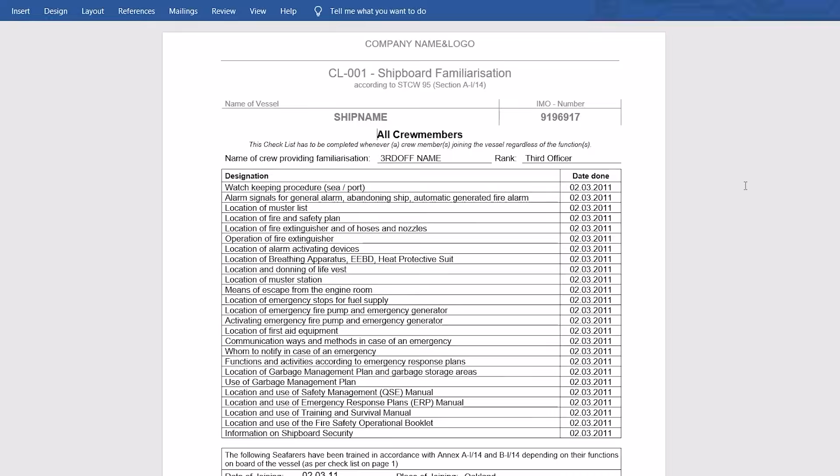In this first part of the advanced guide, let's look at the Shipboard Familiarization Checklist, the document that is one of the first you will have to deal with when joining the ship.

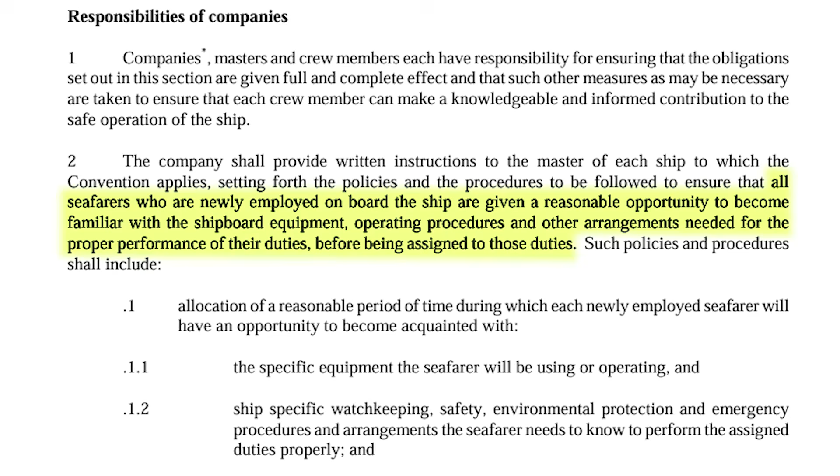In accordance with the STCW convention, all seafarers who are newly employed on board the ship should be given a reasonable opportunity to become familiar with the shipboard equipment, operating procedures, and other arrangements needed for the proper performance of their duties before being assigned to those duties.

When you come on board, you'll be familiarized with the ship by the third officer that you are going to relieve. Then, using this checklist, you'll show the ship to other newcomers and explain everything in detail. From company to company, these checklists vary, but in common they contain the same information.

So let's go through one of these shipboard checklists, as well as go through the ship with it. Usually, the Shipboard Familiarization Checklist consists of several parts, such as familiarization of all crew members regardless of functions, familiarization of deck officers, familiarization of engineers, and familiarization of passengers.

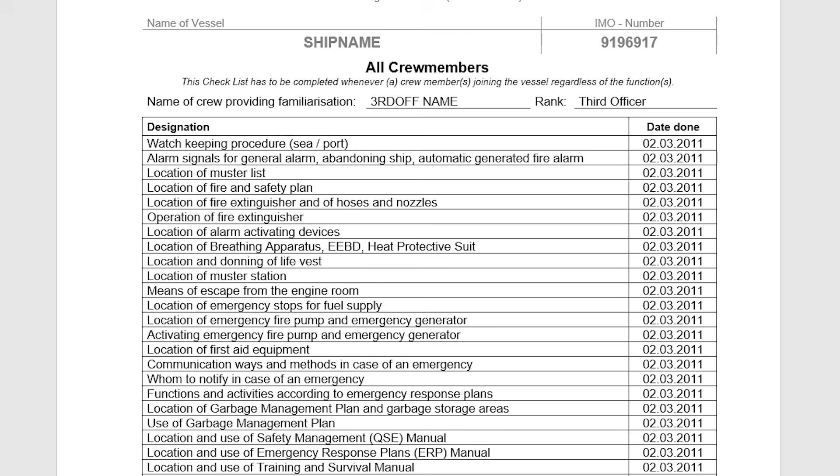Some checklists also are divided into parts based on when familiarization must be completed, like on the day of joining the ship, within 48 hours, etc. Necessary safety-related items have to be covered before sailing or within 1 day respectively. The other items shall be covered within 1 week.

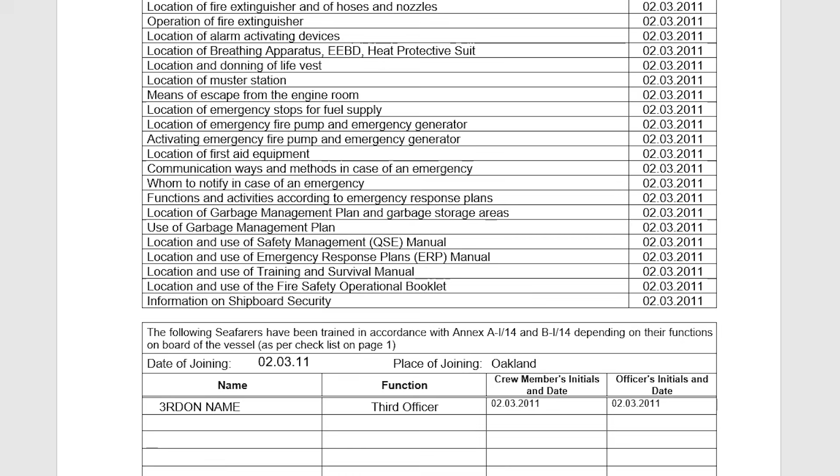After completion, the checklist will be signed by the respective crew members and countersigned by the master. The signed checklist remains in the shipboard file.

So first, let's see what all crew members must be familiarized with: watchkeeping procedure, at sea and in port.

At sea, the third officer usually keeps navigation watches 4 hours on and 8 hours off, from 0800 to 1200 and from 2000 to 2400, taking over the watch from the chief officer and handing over the watch to the second officer. In port, he keeps cargo watches 6 hours on and 6 hours off, from 0600 to 1200 and from 1800 to 2400, sharing the day with the second officer.

If there's a junior officer on board, the cargo watch may be the same as the navigation watch, 4 hours on and 8 hours off.

Usually also the third officer has 2 hours of overtime work when he's busy with maintenance of safety equipment. Exact duties usually are described in company SMS and handover notes that the leaving third officer will give you.

Alarm signals for general alarm, abandoning ship, automatic generated fire alarm. Which alarm signals are used on board you can find in the muster list and your cabin card. Usually they are as follows: general emergency alarm.

7 or more short blasts followed by 1 prolonged blast on the ship's whistle and internal bells, used for fire, collision, or immediate danger, requiring all crew to go to muster stations.

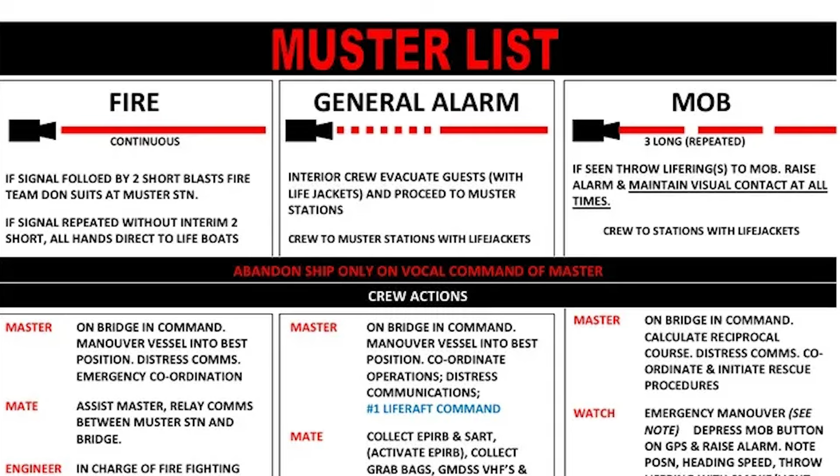Usually 3 long blasts, indicating someone has fallen overboard.

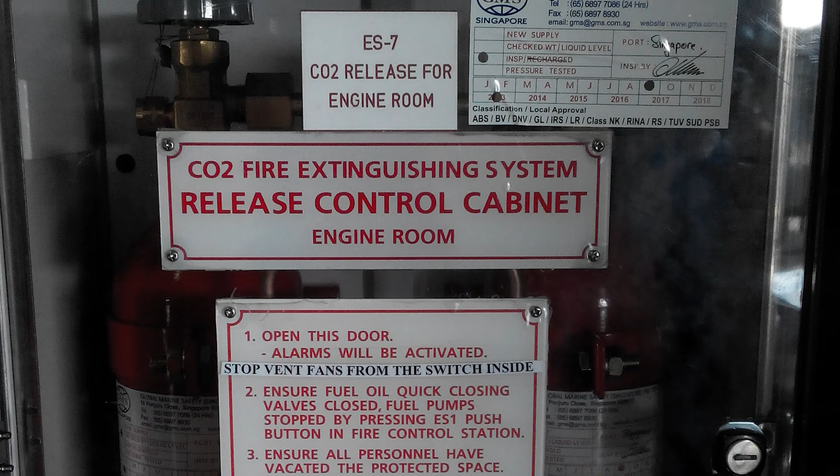Fixed fire extinguishing system alarm, CO2, automatically generated: a distinct, very loud audio-visual alarm that sounds before discharging CO2 or foam into cargo or machinery spaces. But usually, except automatic generated fire alarms, only the general alarm is used with further announcement of the reason.

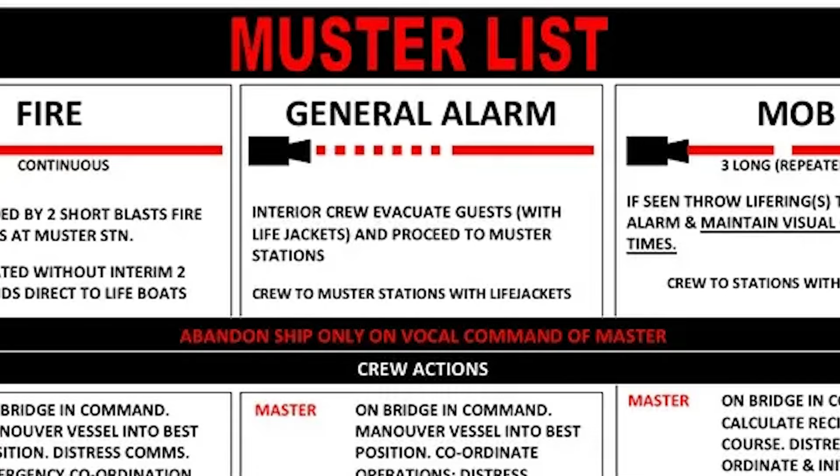General alarm push buttons are usually located on the navigation bridge and emergency headquarters. Additional manual call points, red boxes, are strategically installed throughout the vessel, particularly near exits, stairway landings, and corridors, ensuring accessibility to all crew members.

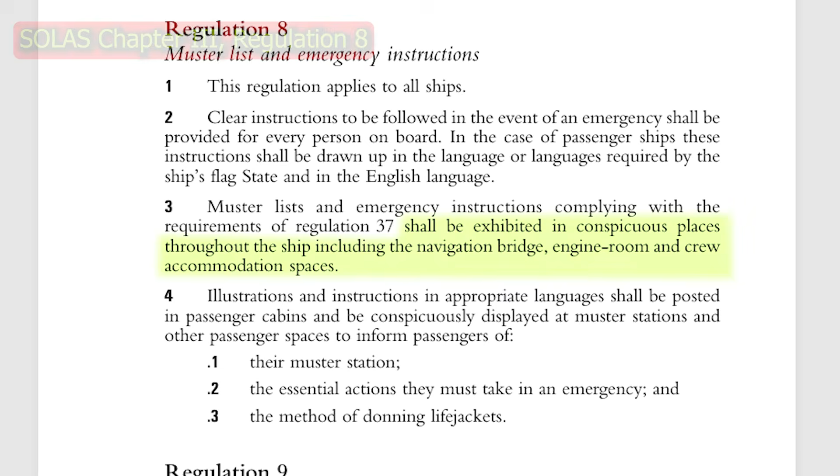Location of muster list. According to SOLAS, muster lists must be posted in conspicuous, highly visible locations throughout the ship, particularly where they can be easily referenced by crew.

Usually those locations are the navigation bridge, engine control room, and all crew accommodation decks. Don't forget also that the muster list with names of newcomers shall be prepared before the ship proceeds to sea.

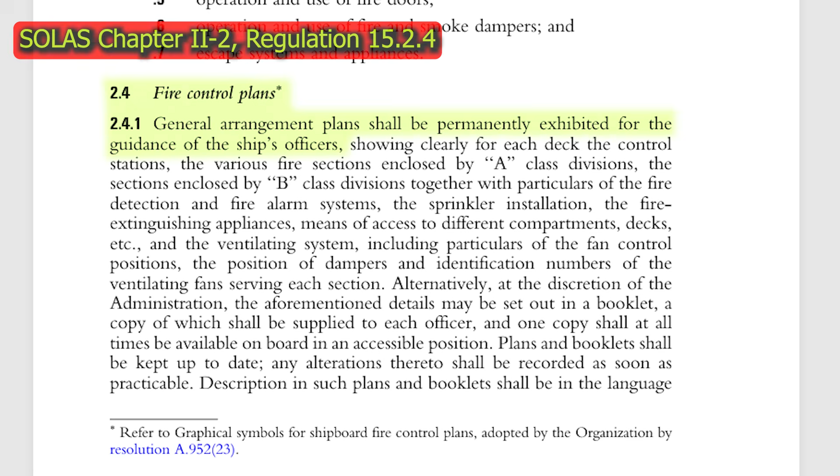Location of fire and safety plan. The fire control plan must be permanently exhibited in conspicuous, highly visible locations for the guidance of the ship's officers. These typically include the navigation bridge, engine control room, and accommodation areas.

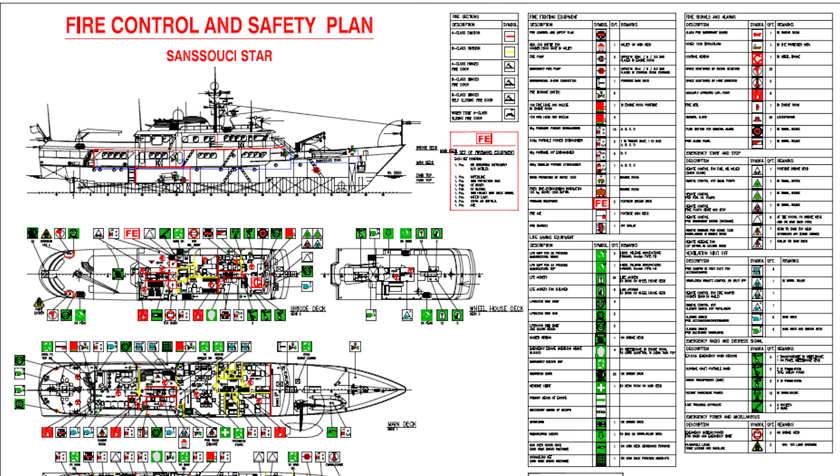A duplicate set of fire control plans or a booklet containing the plans must be stored in a prominently marked, weather-tight enclosure located outside the deckhouse for the assistance of shoreside firefighting personnel.

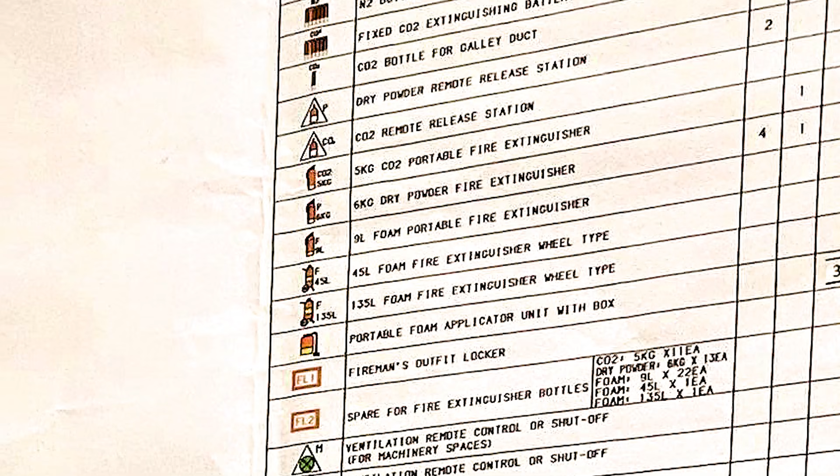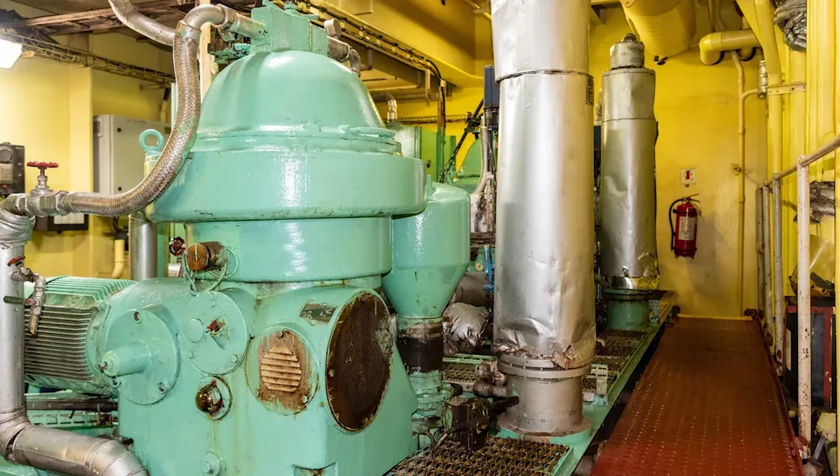Location of fire extinguisher and of hoses and nozzles. Location, number, and kinds of fire extinguishers can be found on the Fire Control and Safety Plan. Fire extinguishers are placed according to the likely fire source: CO2 near electronics, navigation bridge and control rooms; foam near oil; engine room dry powder; accommodation areas wet chemical; the galley, with at least one extinguisher located near the entrance of any major space.

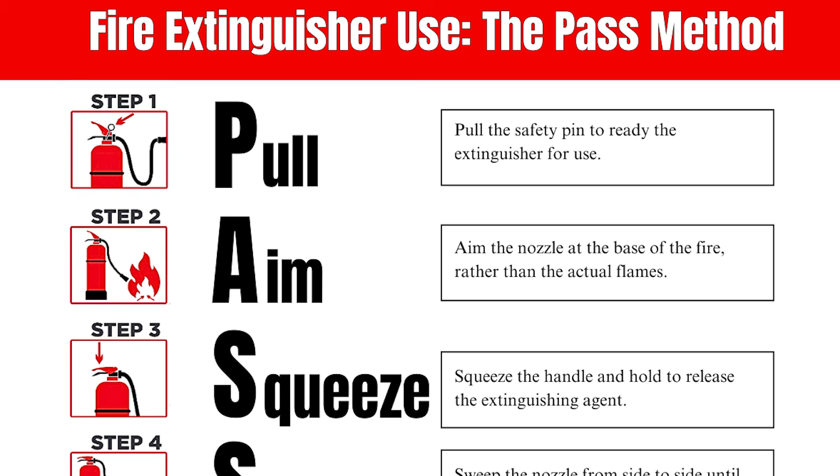Operation of fire extinguisher. The steps on how to operate a fire extinguisher can be found printed on it or in the fire training manual. Most portable fire extinguishers on board ships—powder, water, foam, and carbon dioxide—are operated using the Universal PASS algorithm. This is an international standard that is easy to remember: Pull the pin, Aim the nozzle, Squeeze the lever, Sweep—move the hose from side to side.

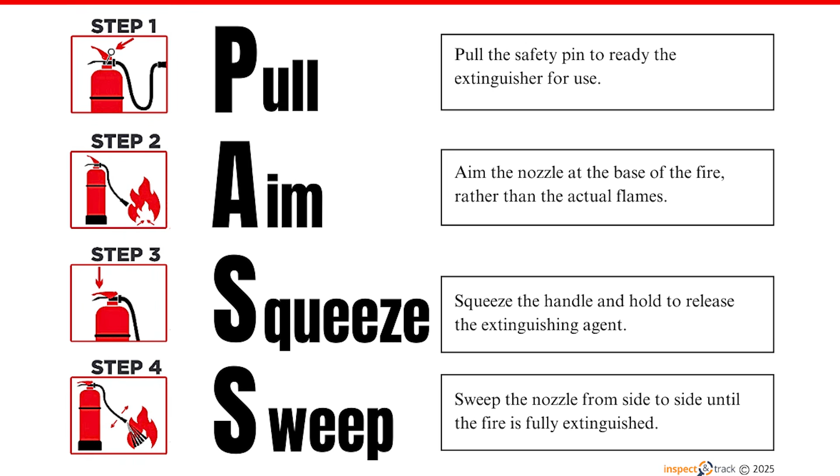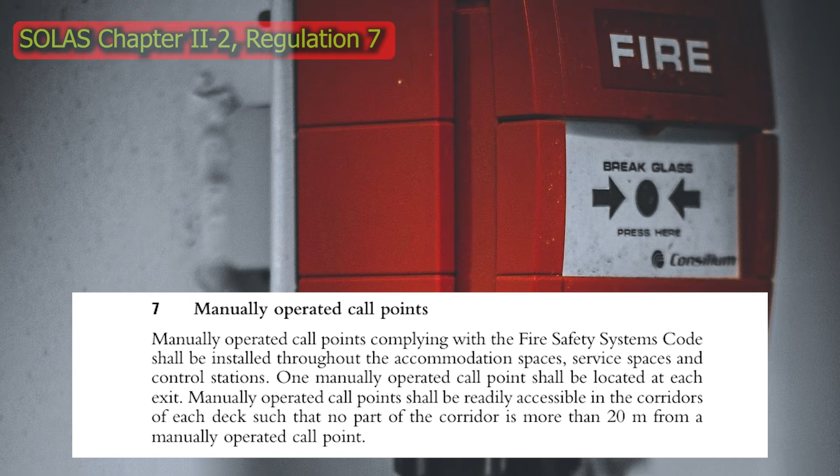Location of alarm activating devices can be found on the Fire Control and Safety Plan. These are the general emergency alarm. The main activation device, the contact maker, must be located on the navigation bridge. Manual call points, the red break-glass buttons that allow the crew to raise the alarm manually, are installed at each exit to the open deck, near stairwells, and in corridors.

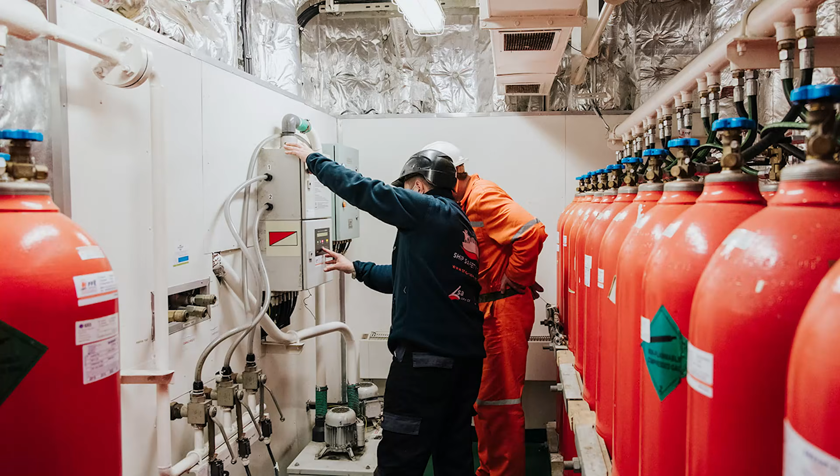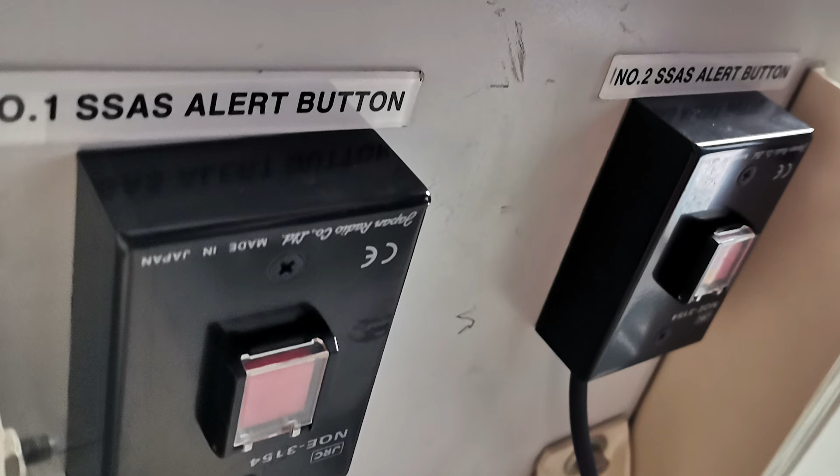Smoke detectors are located in cabins, corridors, stairways, and public areas. The CO2 start alarm is activated automatically when the door of the control cabinet for starting the volumetric fire extinguishing system is opened. The Ship Security Alert System is a silent alarm system to protect ships from piracy and terrorism.

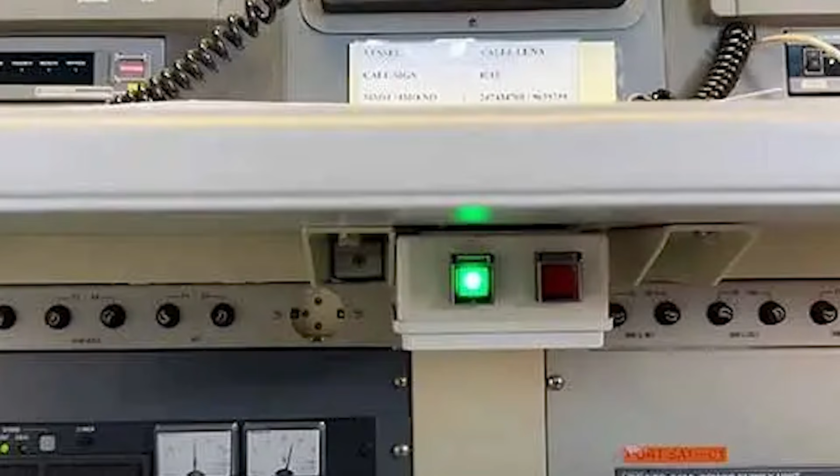SOLAS requires at least two hidden alarm activation push buttons. One should be on the navigation bridge, and the other should be in another location accessible to the crew but hidden from view, for example in the captain's cabin or control room.

Location of breathing apparatus, EEBD, and heat protective suit. These can be found on the Fire Control and Safety Plan. Breathing apparatus and heat protective suit are part of the fireman's outfit that you can usually find in special fire cabinets or at fire stations, typically located in the superstructure, emergency headquarters, and forward in the bosun store or engine room.

Emergency escape breathing devices, EEBD, are intended only for exiting smoke-filled rooms. They are located in corridors along escape routes, in the engine control room, in the workshop, and near the evacuation ladders on each deck of the engine room. Spares are usually stored on the bridge or in the control room.

Location and donning of life vest. Location of life vest, life jacket, can be found on the Fire Control and Safety Plan. In your cabin you should have your personal life jacket and immersion suit. The donning instruction is usually printed on it. You can also find all instructions in the SOLAS training manual that is kept on board the ship.

To don a SOLAS certified life jacket, follow these basic steps: place the vest in front of you, put it on over your head, fasten the waist belt, connect the buckles at the waist, and tighten them as tightly as possible. Secure the neck and chest straps.

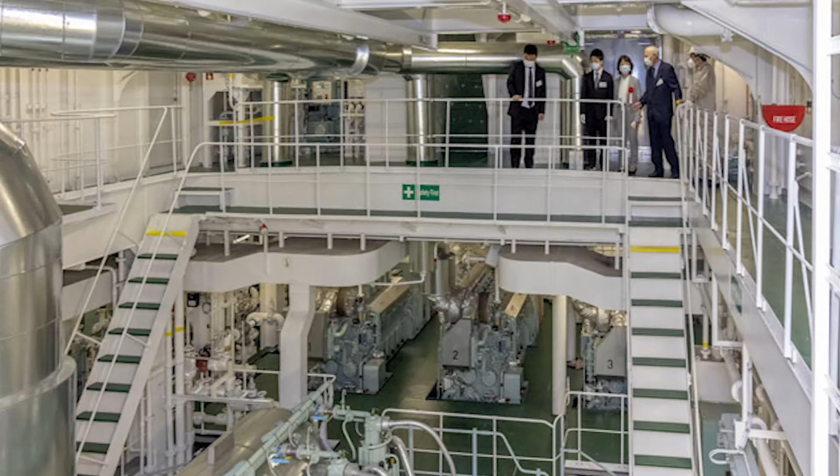Means of escape from the engine room. According to SOLAS, at least two widely separated independent means of escape must be provided from every engine room and machinery space. These typically include vertical steel trunks, ladders, and stairways leading to the open deck, designed to prevent heat and smoke inhalation. Vertical escape trunks are frequently used for quick exit, often leading from the lower platform of the engine room to the top deck or aft toward the steering gear compartment.

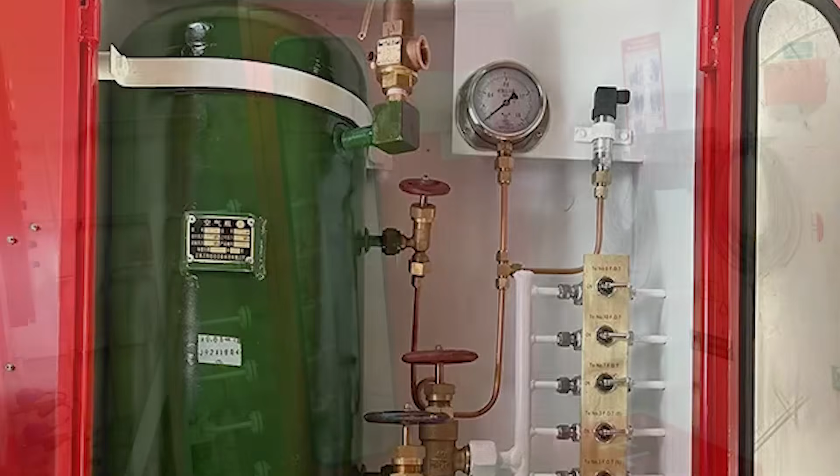Location of emergency stops for fuel supply. Emergency stops, quick-closing valves for ship fuel supply, are commonly located in the engine control room, navigation bridge, and outside the engine room entrance at designated fire control stations. These remote-operated stops allow for rapid fuel cutoff in emergencies, with actuators typically situated in accessible, safe areas away from potential fire risks.

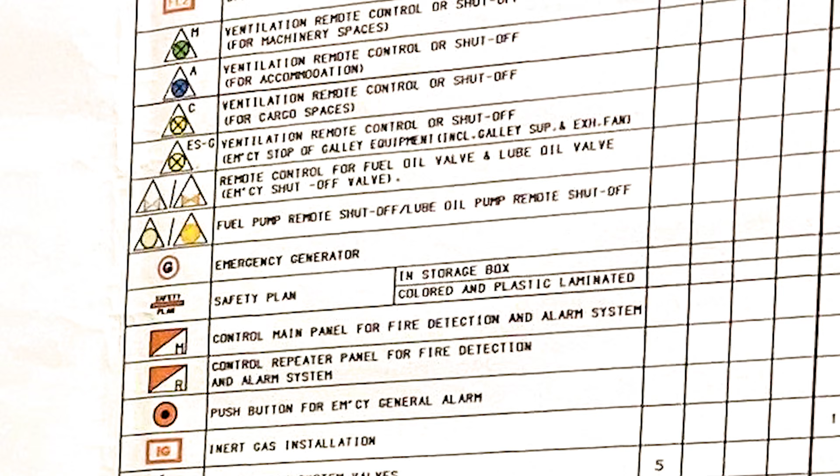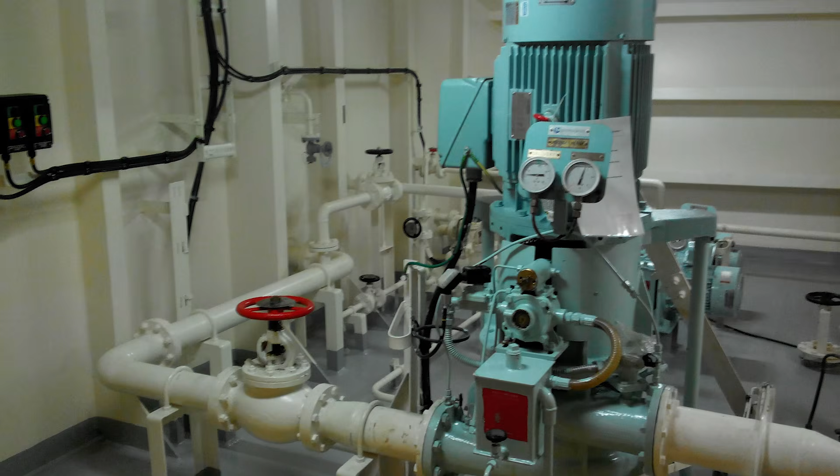Location of emergency fire pump and emergency generator, and activating them. Their location you can also find on the Fire Control and Safety Plan. The emergency fire pump is usually located in a dedicated compartment outside the engine room or forward in the bow thruster room. Usually you can start it from the navigation bridge, engine control room, or its dedicated compartment. The emergency generator is usually located far from the main engine room, often in the superstructure, to prevent a single fire from disabling both main and emergency power.

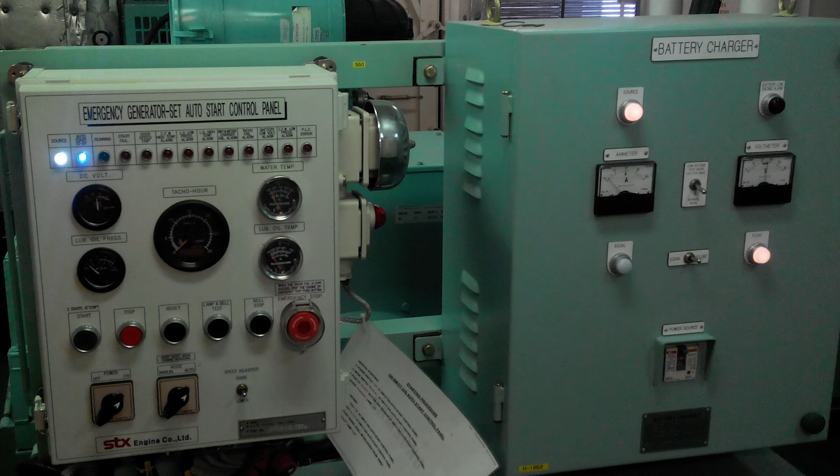The generator starts automatically when a blackout is sensed. An emergency generator on a ship can be started from the emergency generator room, or remotely from the engine control room and bridge.

Location of first aid equipment. In addition to the main ship's medical chest and lifeboat and life raft first aid kits, usually there are a couple more places with first aid kits, like the bridge, engine room, and galley.

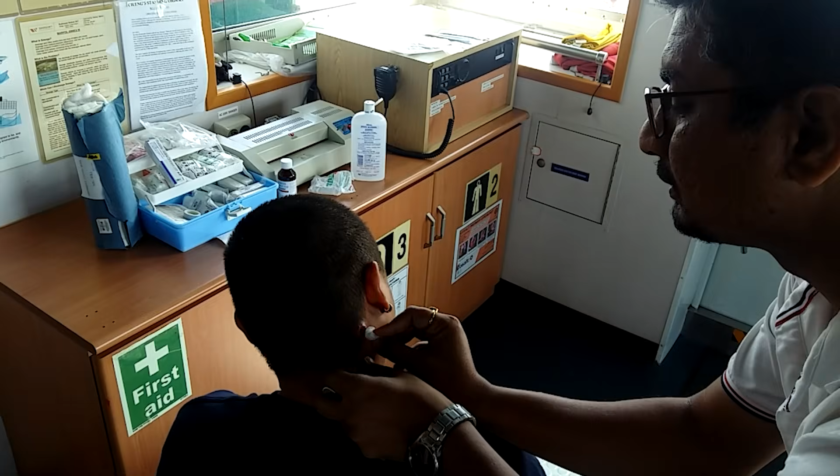Communication ways and methods in case of an emergency. Internal, onboard emergency communications include the general emergency alarm, a signal of 7 short blasts followed by 1 long blast on the ship's whistle and internal alarm system, repeated at least 3 times.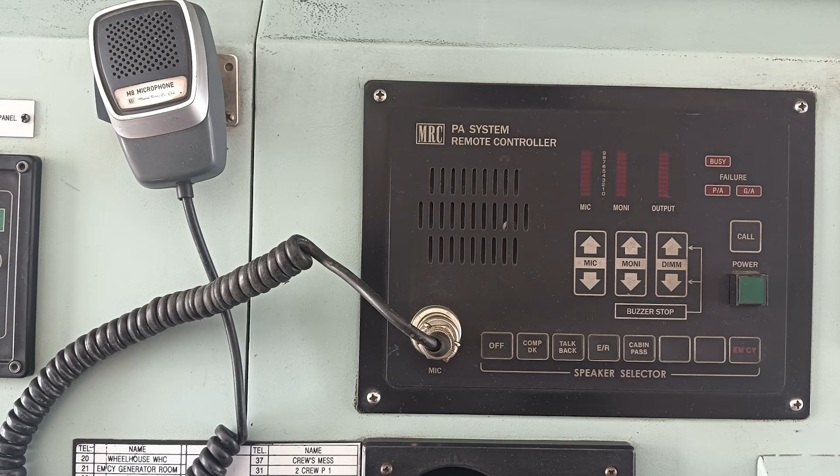Public address, PA system, used for clear voice instructions from the bridge, often superior to alarms in high-noise areas. Sound-powered telephones operate without electricity, allowing communication between key stations - bridge, engine room, steering gear - even during a total power failure. Portable UHF walkie-talkies are used by fire teams or deck crews, often intrinsically safe and explosion-proof.

Whom to notify in case of an emergency. On board, you should inform the bridge and notify the master if something happens.

Use VHF Channel 16 or DSC, Digital Selective Calling button, for a Mayday call to the nearest Coast Guard or Maritime Rescue Coordination Center. Use of GMDSS equipment is usually a separate topic for nautical officers and is not part of familiarization for all crew members. Usually it is company policy that only a certified officer must have access to GMDSS equipment.

Functions and activities according to emergency response plans. Emergency response plans on ships are structured procedures designed to ensure rapid, coordinated action to protect lives, the environment, and the vessel. These plans, often integrated into the Safety Management System, SMS, under ISM code requirements, define specific roles, assembly points, and actions for various scenarios.

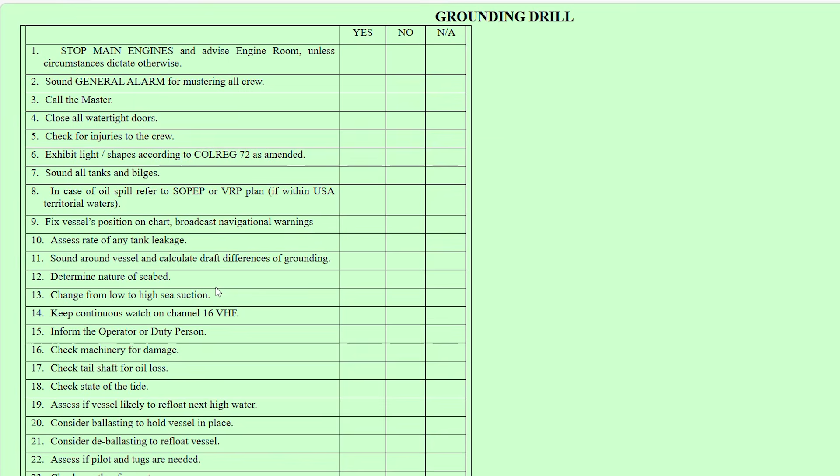In short, this is a document which describes what to do during fire, abandon ship, man overboard, oil spill, flooding, etc. Your personal duties you can find in the muster list. Hard copies of this document are usually located in designated places, like the ship's office and the bridge. Soft copy is located in the ship's computer, usually as part of the company SMS.

Location of garbage management plan and garbage storage areas, and use of garbage management plan. A garbage management plan outlines written procedures for collecting, storing, processing, and disposing of waste, with designated storage areas, often near machinery spaces or away from accommodation, that allow for sorting, compaction, and secure storage.

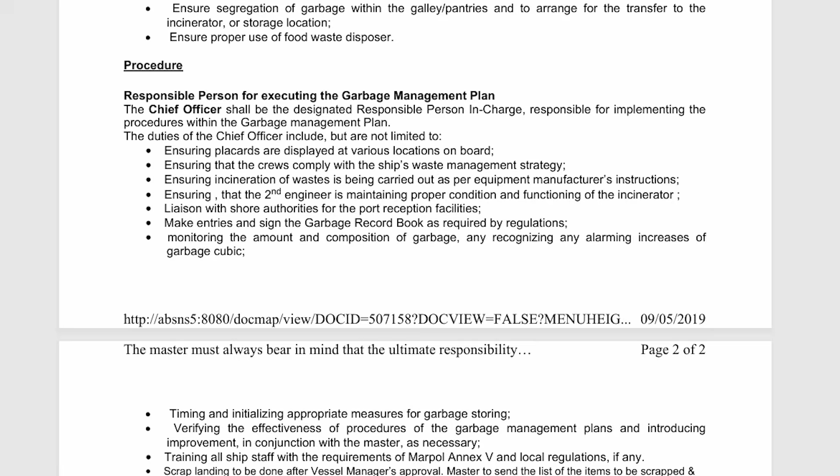Hard copies of this document are usually located in designated places, like the ship's office and the bridge. Soft copy is located in the ship's computer, usually as part of the company SMS. The crew is also usually familiarized with garbage bin colors on board and in cabins, and what kind of garbage each bin is used for.

Location and use of manuals. The location of other manuals and booklets mentioned further in this checklist is the same as previous plans - in designated places, usually the ship's office and bridge. The exception is training manuals, which must be provided in each crew mess room and recreation room, or in each crew cabin.

Information on shipboard security. Regarding security on board, usually the crew is informed and shown the location of the citadel, the place where all hide from pirates, and, if any, the password for entering the citadel - to tell if everybody has hidden and the door is closed, but you are left outside.

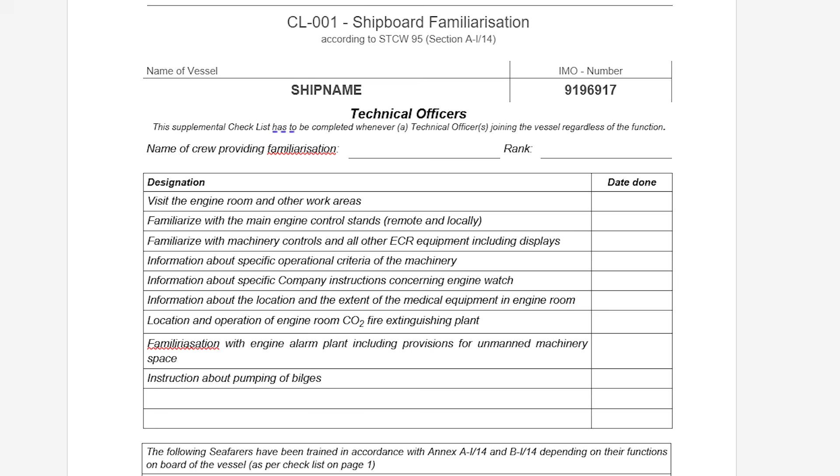There is also the familiarization checklist for all crew members, which they must sign, and then it must be signed by the master. There are also checklists for deck officers and engineers that I think there is no reason to go through - you can just check other videos about navigational bridge equipment on this YouTube channel. The checklist for engineers is used only for engineers, and familiarization is performed by an assigned engineer. The checklist for passengers is nearly the same as for all crew.